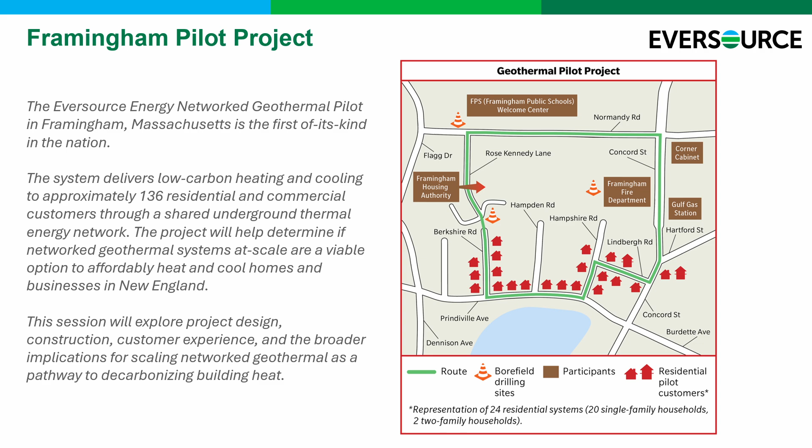But there's monitoring of the network itself constantly from here, so we do have data on how the system performs—the network, pressures, temperatures, etc., constantly. On the customer side, we have Frontier, who's a third-party firm. They collect data at the building level and are really studying how that energy moves in between all the homes. Then HEET, the Home Energy Efficiency Team, they are studying the actual capacity of the bore fields. We have 90 bores here, across 3 separate bore fields in the system.

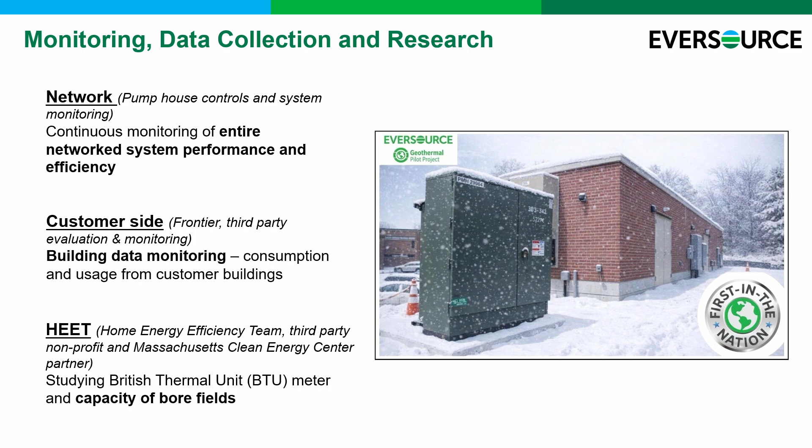We do have a backup boiler in the pump house. Proud to say we never had to turn that on once. But in the event that temperature does get too low, there is some redundancy there—we have never had to turn that on in 2 winters. The low temperature this winter on the loop was just about 41.78 degrees Fahrenheit, and that was recorded when it was 8.9 degrees in ambient air temperature.

24-25, we reached a low of 41.02, and that was when the ambient air temperature dropped to 13 degrees Fahrenheit.

So similar performance. My last note here is really around operational models for utilities. This project moved from pilot, design, science experiment to real-life energy delivery system. People are counting on us, right? The system now can't go down.

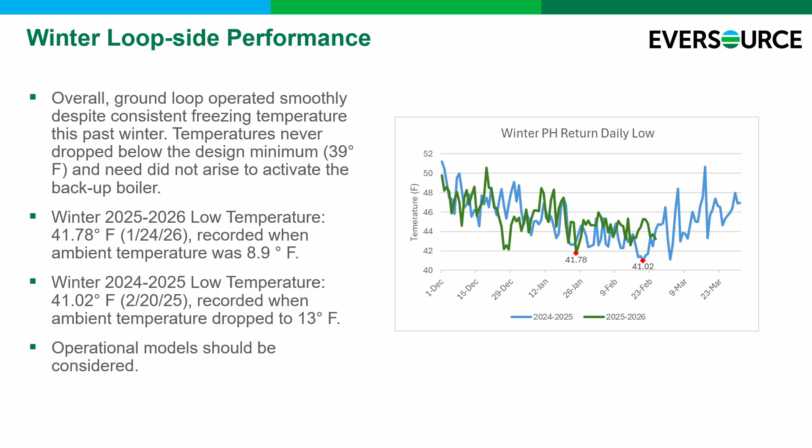Occurrence tracking, we track just about everything, and with good reason. We kind of split these up into two categories. One, which we label behind the meter. So think of that, in this pilot, Eversource actually owns the HVAC equipment, and things go wrong, right? There's things that can happen inside someone's home that we are responsible for, which is not our typical business. And then there's just loop side issues, which we track.

So most of the issues that we face, or occurrences and alarms, are inside people's homes, which is a challenge because now we've got to get through their front door. And they've got to be home and want us there and work in their home. So that's just a split of what we're facing.

The second piece of this is, where do these occurrences happen? Is it residential? Is it commercial, et cetera? Most of it's residential, which shouldn't be a surprise. Most of the customers are residential customers.

10% of these are at the pump house, just alarms and sensors, things rotating, a pump off, things that we have to monitor and make sure are real, and we may need to respond to make sure the system's operating as it should. 6% are bore field, a lot of sensors there measuring the bore fields. So again, just something that pops up, we look at it, respond, make sure everything's working.

2% are commercial and 2% are municipal. Really those are error codes on HVAC equipment, whether it's a freeze out or something that's happened there with condensation and the like. And then the bottom note here is roughly 8% of these occurrences are just quote unquote nuisance alarms. They're not truly anything that we need to respond to after we investigate it.

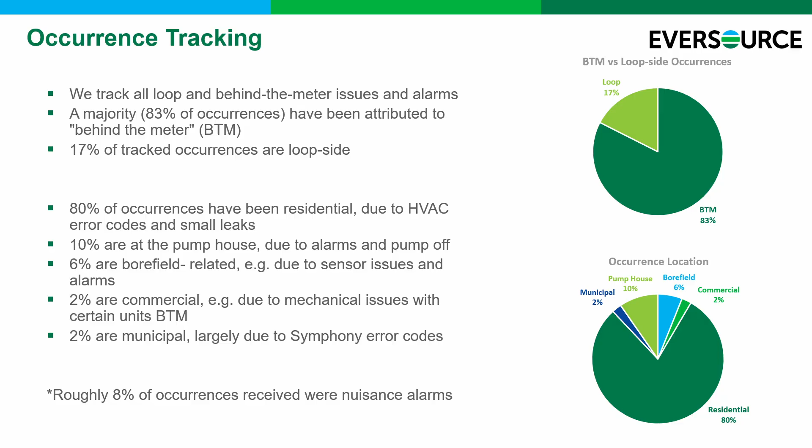The whole thing for us was that, okay, it needs to be even with natural gas likely, and this is a really nice story. And then customer number two is the GEO pilot versus oil, and that customer saved actually about $202 a month when going with geothermal compared to home heating oil.

This to me really is what customers are caring about. They want to understand not only how the system will perform, but what it's going to cost them. And affordability, being what it is, top of mind in our service territory and mostly across the country now in terms of energy, we think there's a compelling story here to make this more affordable over time.

So just some general takeaways from my folks. From a technical perspective, there's a commissioning component here. We learned some valuable lessons in commissioning this network, mostly around chasing air pockets, and there's changing topography along the loop, a little hill here at a high point. So just learning that within the commissioning process is important.

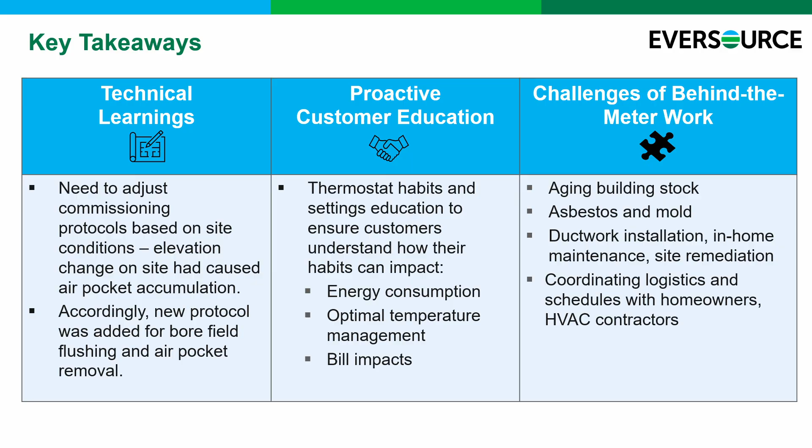And then really coordinating with homeowners - when you have a project like this that needs to come together in harmony, folks need to be available, around, and willing to do it at the same time. And that in of itself can be a challenge.

That's great, we know who the red ones are - they voice their opinions early, they call us all the time. But most people are happy, they're happy with their comfort level, they're happy with what they have. The team's done a tremendous job making sure customers understand, but the summer value of this can't be understated.

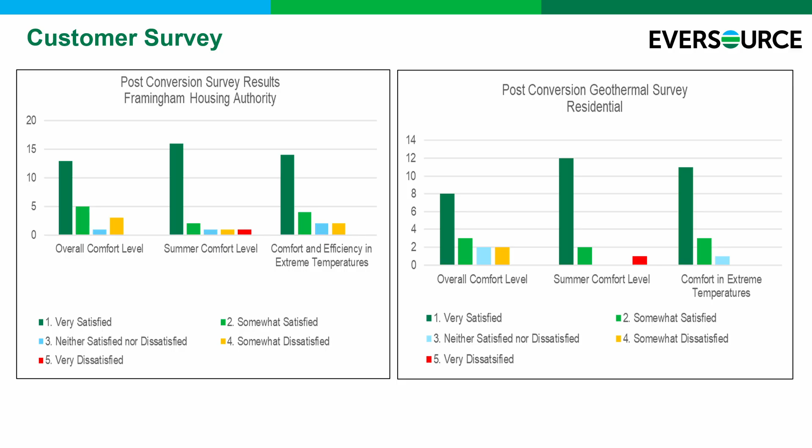So lastly, for any resources, go to the website, give us an email, we're around to answer questions. And about the pilot, we're hoping to expand off of that going forward. So that's all I had, thank you for your time.

That was great. We've been waiting two winters for that.

My name is Greg Koumoullos, I'm Department Manager at Con Edison. For the non-locals here, Con Edison is also an investor-owned utility operating gas, electric, and steam in New York City and surrounding Westchester area. We're at an interesting point right now, and this presentation, the structure of it, really shows the differences of where we are. I'd love to share tons of facts with you, stats, charts, graphs, but we're not quite there yet in the operation.

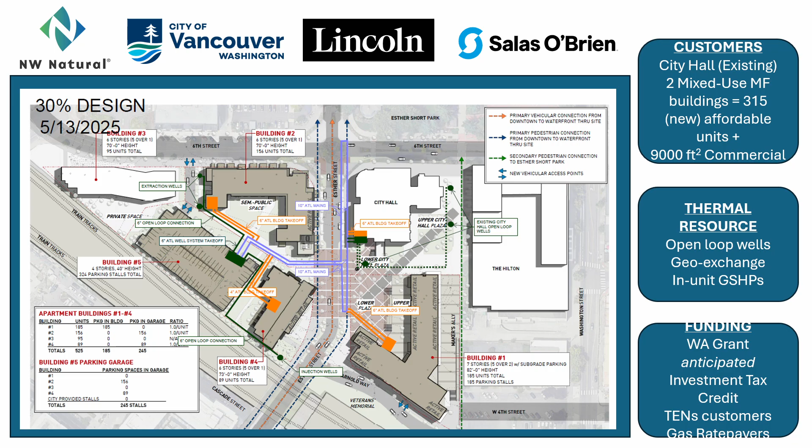So trying to find the balance between expandability and low first cost. The orange is going into each of the buildings and the heat exchangers. It's harder to see, but there are 2 sets of wells. This is all open loop, so we have 2 extraction and 1 injection well on each side of the property. So it's just like a feel for our site.

And now the lessons learned, the fun part. Engage with the legislators early if you get the opportunity.

We were able to take some of the information from Eversource. They said, what will it cost to build a thermal energy network? I said, that's based on so many factors, so let's figure out a couple anchors and then we'll give you a very rough number. But I remember calling Eric Bosworth in short order and getting some numbers. So engage if you get the opportunity, and don't resist.

I don't know, every utility is probably in its own spot in terms of whether they want TENS legislation or not, but our take was that we did want this. I was already very excited about this before the legislation, but if you work alongside them, things usually go easier for you, and we ended up with many fewer 'thou must' and many more 'thou should consider.'

We targeted new construction. You heard from the previous speakers, there is a lot of work in getting everyone signed up within the network. We know that we will need to do that as TENS take off and we do more and more of these, but on these first projects, we've had the philosophy that let's walk before we run.

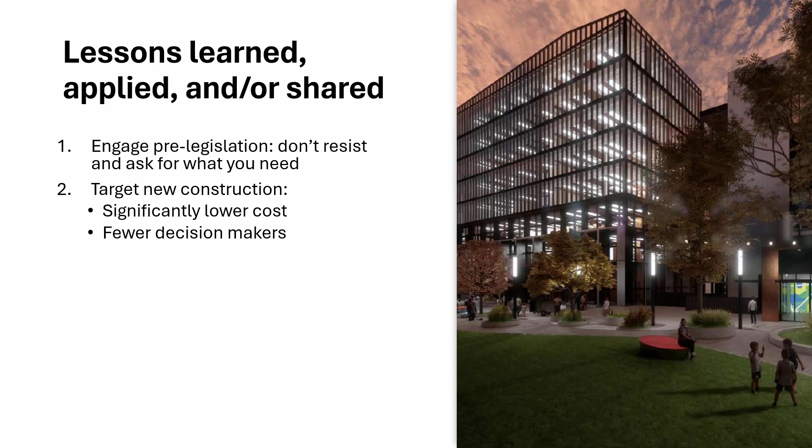Let's start something simple. We already had the partner in the city, so we wanted to work with that. I'm sorry I failed to mention the partners at the top of the slide, but Salas O'Brien was on there, our design engineer. So lower costs up front, fewer decision makers, and we really needed to move fast with the timelines in the bill, so that felt appropriate from that standpoint as well.

Talked about this one. And I feel like the biggest learning that I'd want to pass on, that worked well for us, is think like the regulator. Think like the regulator. They haven't regulated these before. This is hard, this is new.

At the time this passed, our commission was going through a lot of scandal, so I was concerned they might not even pay attention. They were so busy, they have so much on their plates. TENS comes through and we don't have to do it, it's all optional. So will this ever rise in priority?

So we had all of that in mind and worked first with all of the other gas utilities in the state of Washington to get on the same page and make sure we had the questions ironed out. We were trying to be as clean and organized about this, and come forward with one set of questions, one set of philosophy, to try to make it easier for them.

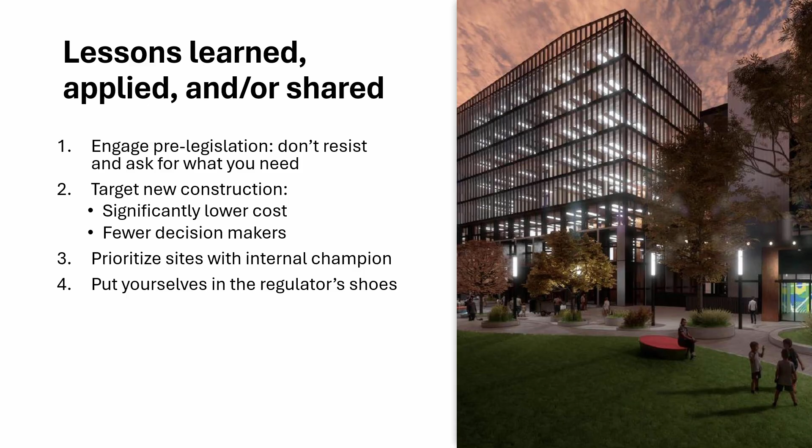I think, yeah, coordinate with the affected utilities. And excellent, we'll have no problem meeting the 3 minutes.

Coordinate with the affected utilities, and we actually set up a technical working group so that we're meeting every month with the Department of Commerce, who's issuing the grants, the other utilities, and the commission, of course, and we're using these as learning sessions. The idea is let's all get smarter together.

We're saying this is new for all of us. This is hard for all of us, but it's going to have a different angle on why it's hard. But let's get smarter together and learn about a thing in a different setting than when we make a decision about a thing, because it's just uncomfortable. We're not making our best decisions if we've just learned and now we have to regulate or make a big decision.

There is something else on this. Sometimes notes are good. Coordinate with the affected utilities, regulators' shoes. Oh, I know, it should actually be a bullet.

I was really concerned about not actually knowing when we were going to be able to meet with the regulators. And if they understood this, if they wanted this to happen, that was going to make a big deal on how everything else went.

So we had our first meeting where we brought in the representative who wrote and drafted the bill, along with all the utilities and stakeholders, and he presented it. We were all in there eyeball to eyeball, seeing and hearing the same thing, and it set the tone for what we wanted to create together. Having it start that way was good for getting their attention. We're all in the same room, we've all got a different angle on this that we need to lean into to help manifest this. That seemed very helpful in getting their attention for future meetings, and they have been amazing.

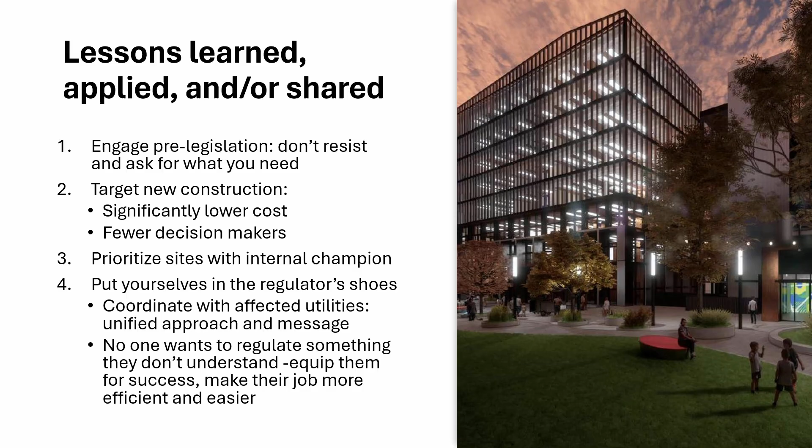So here's my little proof, kind of the outcome we've gotten to so far in this process.

We submitted our rate case, and the staff then gave their recommendation to the commissioners. They heard and understood that we're working with, even though our bill doesn't say 'thou must' on very many things, there is a whole laundry list of things you have to consider. So when we write our testimony, we need to say here's how we considered this, here's why we did this, we want to walk before we run, so many things.

They basically echoed our words back to the commissioners as their recommendation. I pulled out a little excerpt: they acknowledged the net result is a challenging scenario and a set of priorities that compete with one another. The commission is left to choose between those competing priorities and associated costs. To paraphrase the late, great Mr. Rogers, today's word for the commission is trade-off. I thought that was really good, that they recognized this is difficult and that we need to be really practical about this. And it ended up that our rate case settled months early, and the TENS was part of that, so we're feeling really good about it.

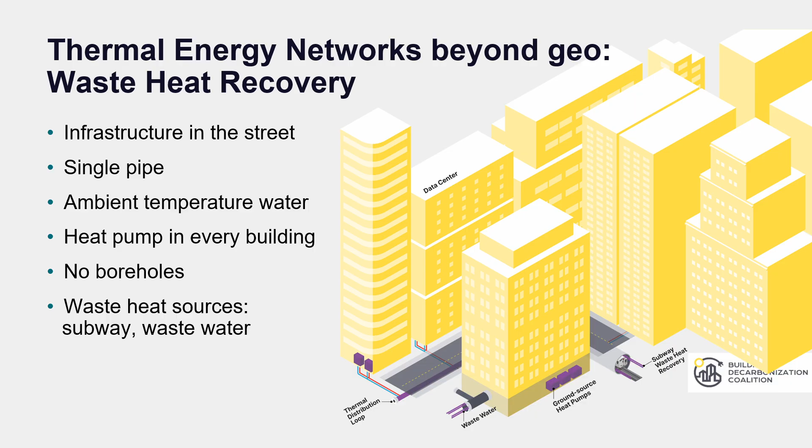One interesting aspect about UTENJA is that it really encouraged looking both at geothermal and beyond geo, at waste heat recovery and heat recycling. I think this speaks to the electric side impacts that Greg was talking about, so it encouraged ambient temperature loops. As we've seen in some of the projects that have emerged, there's everything from waste heat capture with data centers or sewage treatment plants, sewer main heat recovery, as well as just capturing heat in buildings and recycling it.

I know Carter from SUNY is in the room, and the SUNY campuses and public buildings have really identified an opportunity to lead by example in decarbonizing their operations using thermal energy networks. SUNY Purchase, SUNY Oswego, SUNY Binghamton, University of Buffalo, University at Albany—these campuses have been drawing down money that's been allocated in the budget for thermal energy networks to actually decarbonize their operations.

And I think the timing couldn't be better. An example that stood out to me in a recent conversation with SUNY Purchase's energy managers: a lot of these campuses were developed many decades ago, and their current heating systems are at the end of useful life. They lost heat for several days this past winter from that existing natural gas powered system, which is obviously not good for students, not good for classroom learning to not have heating.

And so they're really seeing the opportunity to meet their climate goals, do building electrification, but do it in a way that reduces the impact on the electric grid and actually sets them up to be kind of learning labs of innovation in the state.